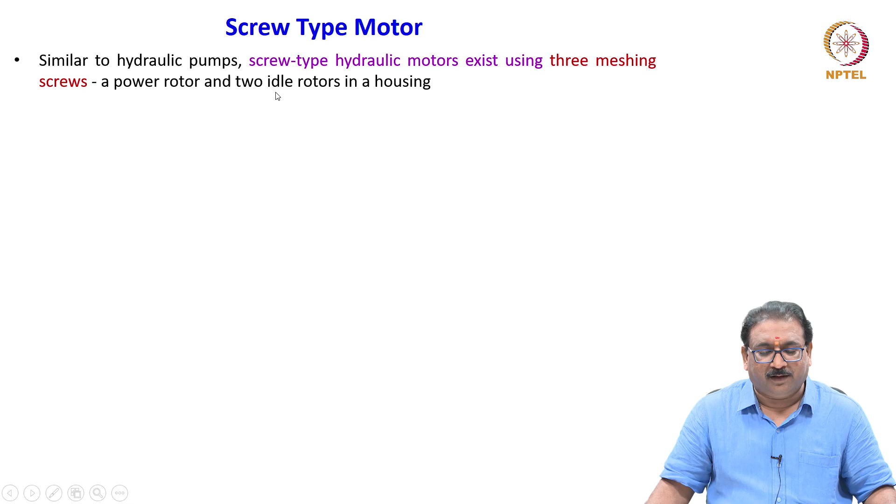Now we'll move on to another type of motor, the screw type motor. Similar to hydraulic pumps, screw type hydraulic motors use three meshing screws: one power rotor and two idle rotors in a housing. The middle one is the power rotor, or power screw, connected to the shaft. The two outer ones are the idle screws, which move when the center one moves.

This is also the view which will show the three screws in the housing.

The rolling screw set results in extremely quiet operation. Torque is developed by differential pressure acting on the thread area of the screw set. Here you see the inlet and outlet. The inlet is high pressure fluid, which acts on the surface area along the axis of the screw.

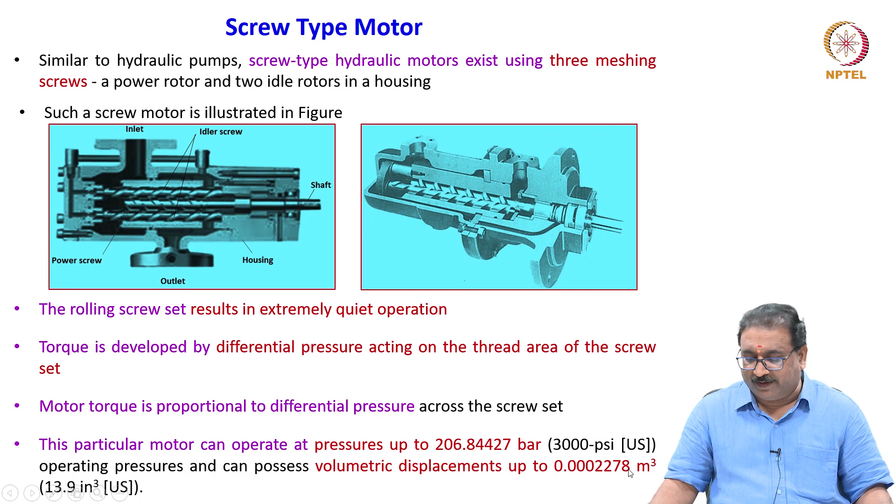The fluid rotates along the axial direction, then goes to the outlet. Motor torque is proportional to the differential pressure across the screw set. This motor can operate at pressures up to 206 bar operating pressure, and can possess a volumetric displacement up to 0.0002278 cubic meters, or 13.9 cubic inches in US customary units.

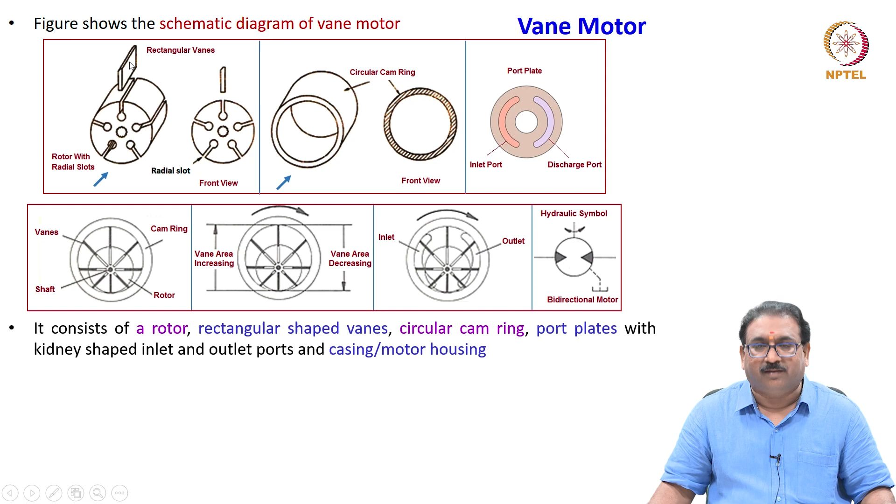Now we'll see the constructional details. I've already told you, so we'll go quickly. It consists of a rotor, rectangular shaped vanes, circular cam ring, port plates with kidney shaped inlet and outlet ports, and a casing or motor housing. All are enclosed in the motor housing, which is not shown in this figure.

The rotor has radial slots in which the vanes slide in and out. The rotor is connected to the driven shaft, where you require the torque and speed with a pressurized fluid and flow rate. Both the shaft and the inner hole of the rotor are splined. The assembly of the rotor, vanes, and shaft is placed inside the cam ring eccentrically.

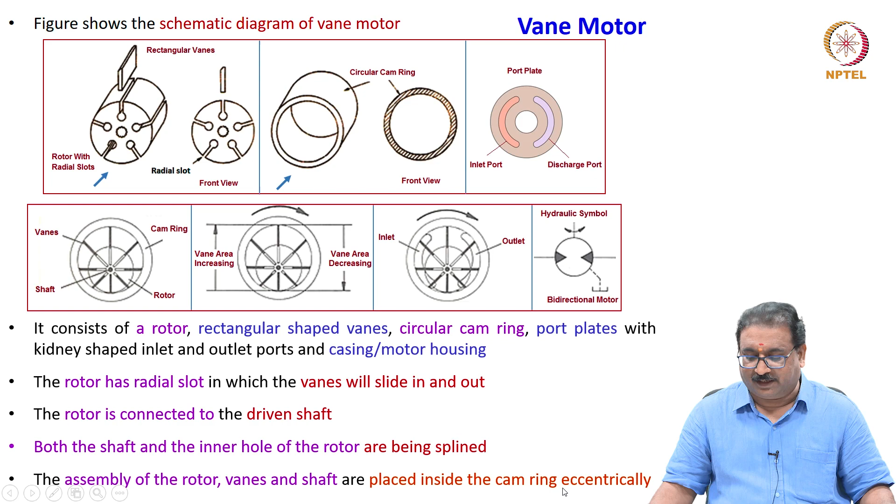You will see the vanes are always in contact with the cam ring. They provide the positive seal. How to achieve this, I will tell you.

As the rotor revolves, the vanes follow the surface of the cam ring. Springs or hydraulic pressure underneath the vanes are used to force the vanes radially outward and keep them in contact with the cam ring based on their position. Some are inside the rotor, as I told you, and some are outside because of the eccentricity between the cam ring and the rotor.

You have to make an arrangement such that the vanes are always in contact with the cam surface. How to do this? As I told you, using springs or hydraulic pressure. I'll tell you now how it is.

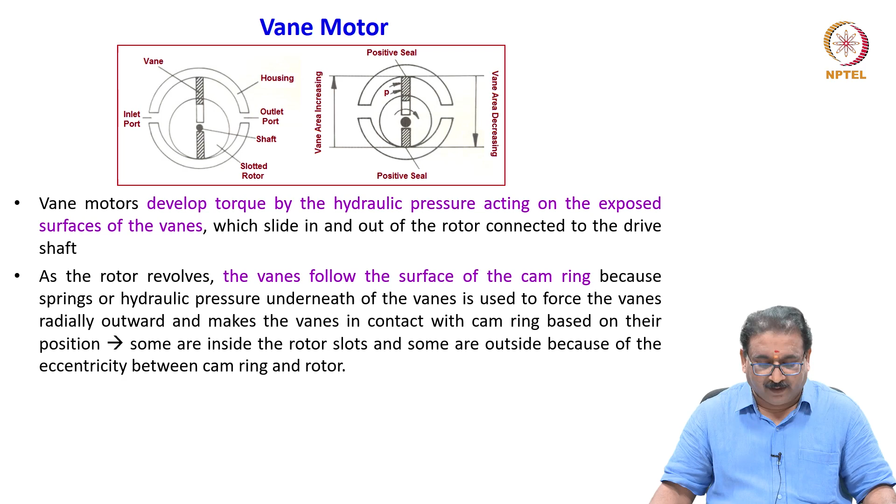Please note, no centrifugal force exists until the rotor starts to revolve. Therefore, the vanes must have some means other than centrifugal force to hold them against the cam ring, achieved through any one of the following methods: using a compressing spring, or a wire spring, or hydraulic loading. Use any one of these methods to keep the vanes always in contact with the cam surface.

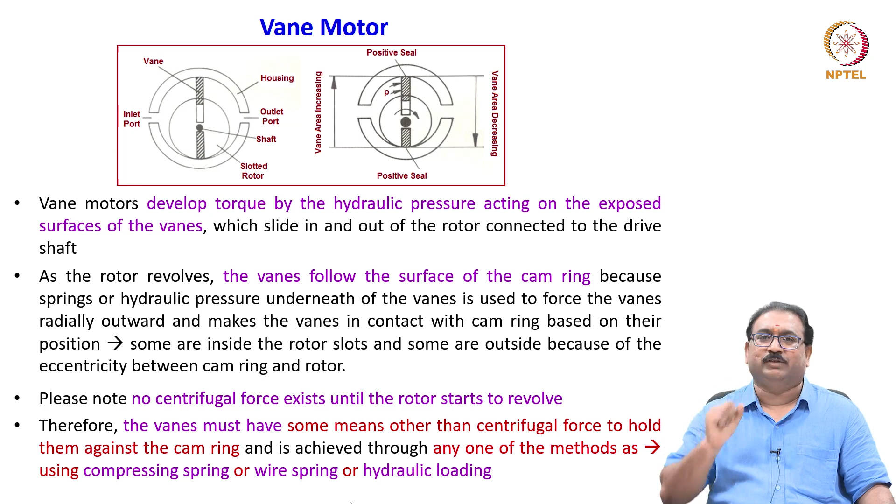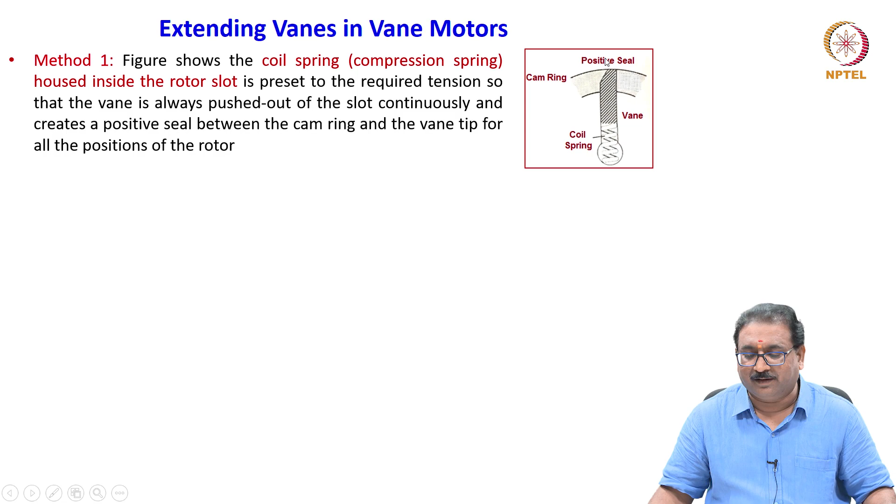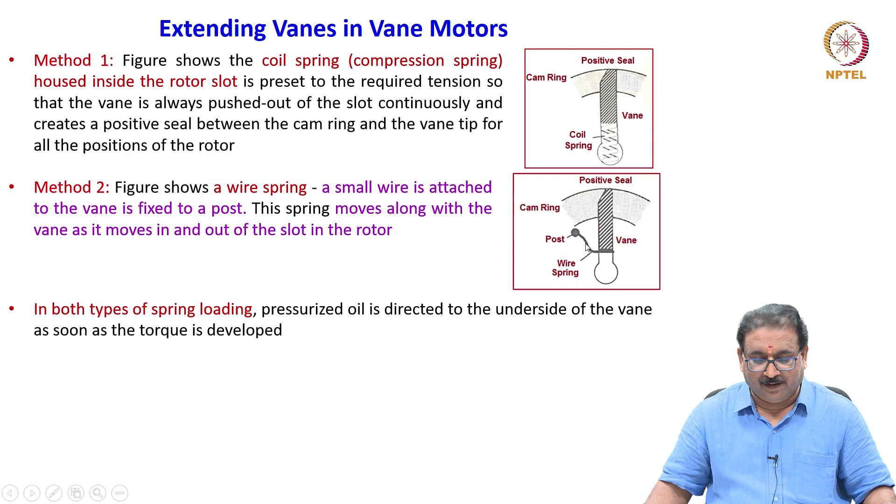In both types of spring loading, you load it like this or like this. The pressurized oil is directed to the underside of the vane as soon as the torque is developed. Method 3: underneath the vane, a high pressure oil always makes the vane form the positive seal along with the cam ring.

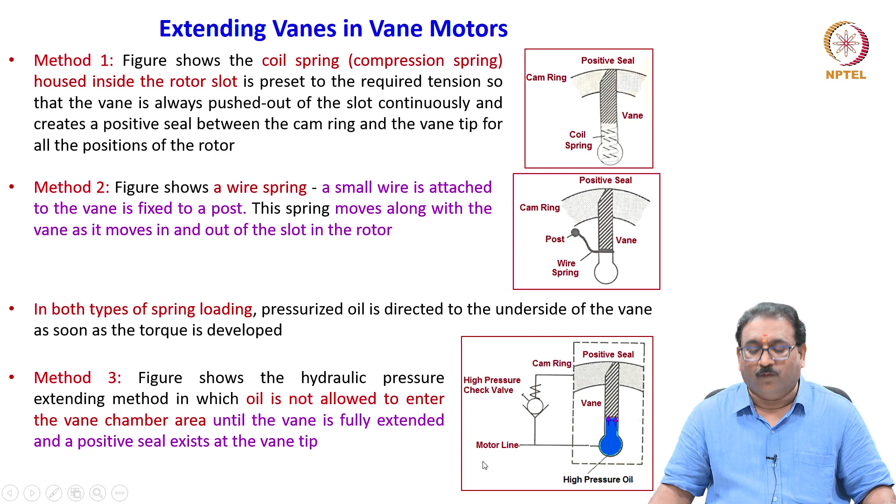The figure shows the hydraulic pressure extending method, in which oil is not allowed to enter the vane chamber area until the vane is fully extended and a positive seal exists at the vane tip. That is the beauty here: once it is fully extended and making the seal, oil will enter the chamber.

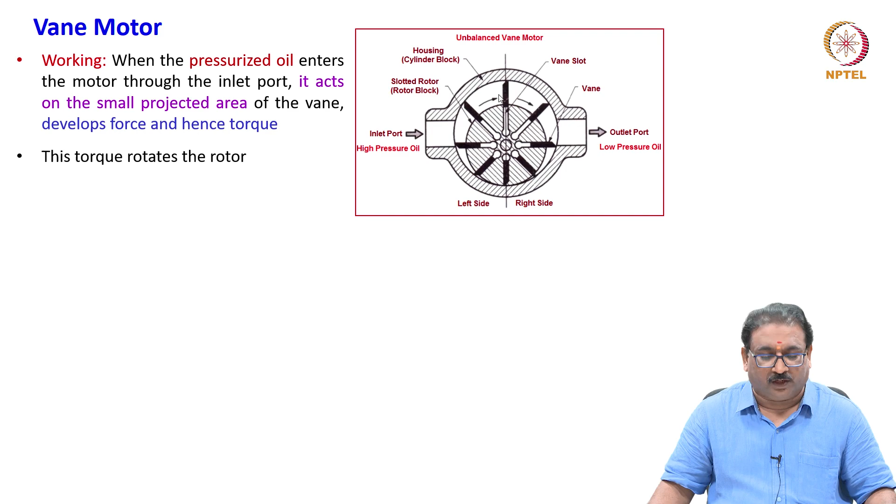When the pressurized oil enters the motor through the inlet port, it acts on the small projected area of the vanes, developing force and hence torque. This torque rotates the rotor. As the rotor rotates, because of the eccentricity, the vanes slide out, resulting in more surface area and more force. Hence, more torque is developed.

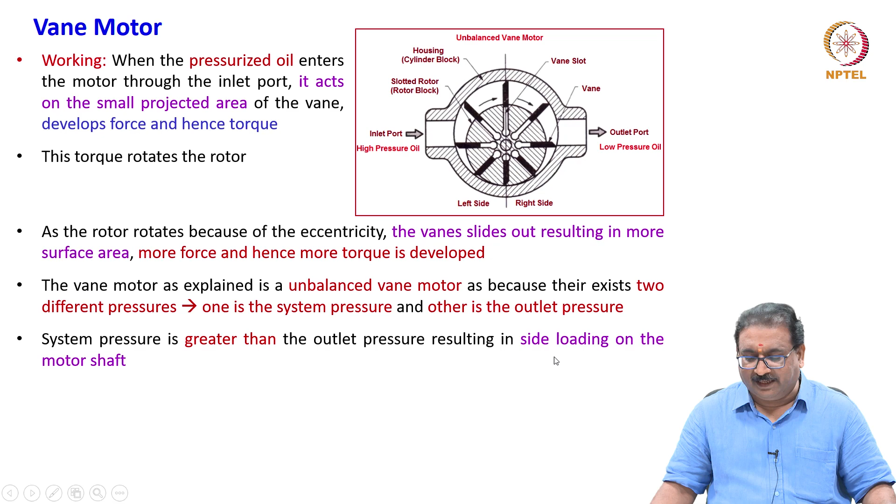The vane motor, as explained, is an unbalanced vane motor because there exists two different pressures. The inlet pressure is system pressure, very high, and the outlet pressure is a very low pressure, which is tank pressure. System pressure is greater than the outlet pressure, resulting in side loading on the motor shaft.

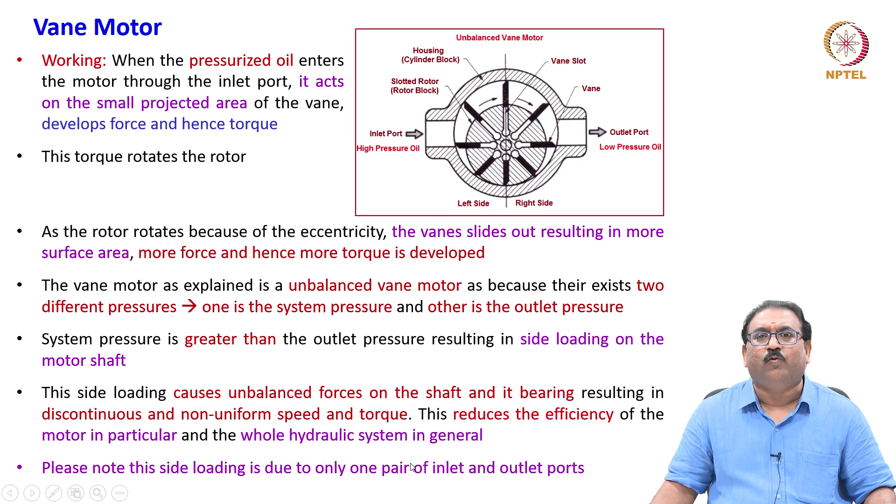The side loading causes an unbalanced force on the shaft and its bearings, resulting in discontinuous and non-uniform speed and torque. This reduces the efficiency of the motor in particular and the whole hydraulic system in general. Please note, this side loading is due to there being only two ports, the inlet port and outlet port.

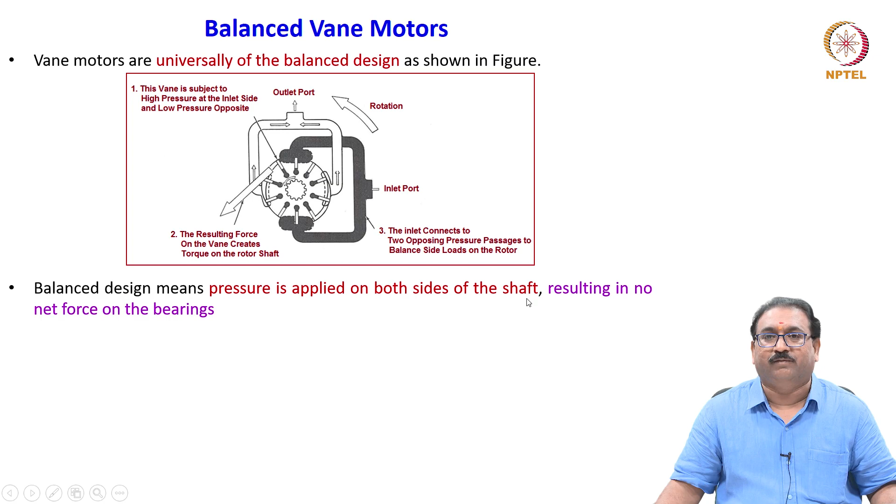How it will work, you will see now. The balanced design means pressure is applied on both sides of the shaft, resulting in no net force on the bearings. This increases the maximum operating pressure and the drive speed at which the motor can rotate.

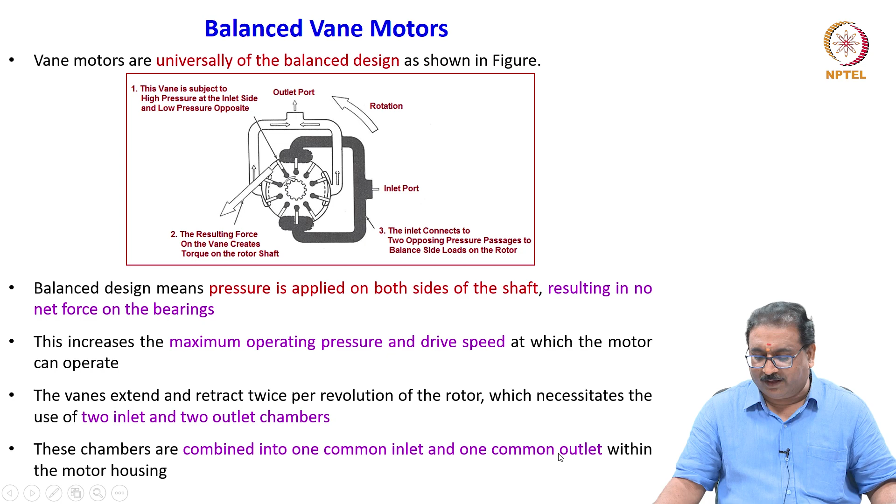The vanes extend and retract twice per revolution of the rotor, which necessitates the use of two inlet and two outlet chambers. These chambers are combined into one common inlet and one common outlet within the motor housing.

The figure shows the balanced vane motor design, where a pivoted rocker arm is attached to the rotor and serves as a spring to force the vanes outward against the elliptical cam ring. Please see here carefully, friends.

Here the spring is there, see here. This is a rocker arm. This spring is used to keep the vanes always in touch with the cam ring.

The cam ring here, see the elliptical cam ring, and you will see the inlets exactly opposite the outlets. These are the vanes, meaning here the inlet, where I have marked the black color, is hydraulically balanced. You will also see here to understand better how the vanes are kept always in touch with the cam ring.

You will see here when it moves inside, this will compress, this will expand. Here it is a pin. This is what we call the rocker spring, which is used to keep the vanes always following the surface area of the cam ring.

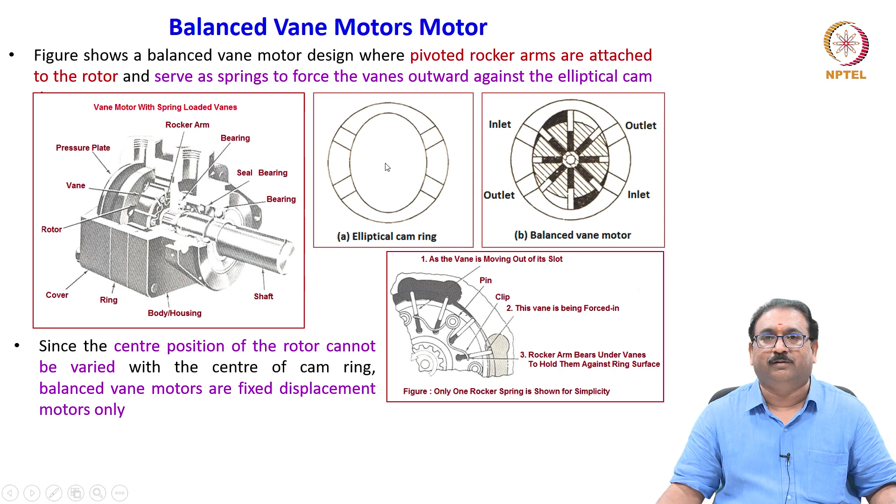This type of motor is available to operate at pressure up to 172 bar and at a speed up to 4000 rpm. The maximum flow delivery is 946 liters per minute, or in US customary units, 250 gallons per minute.